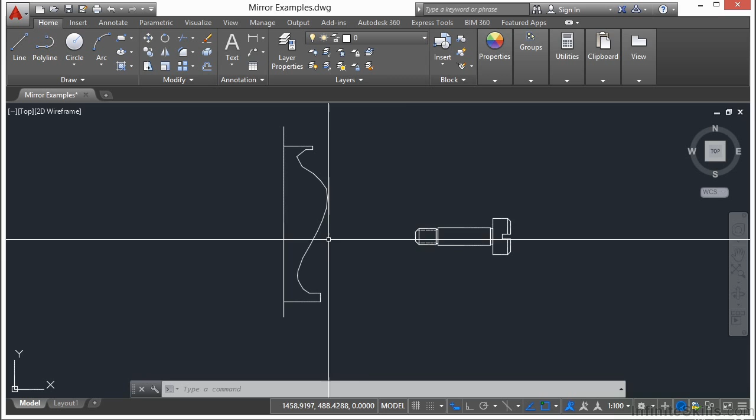Here we have two objects that have already started drawing for us. One is this hex head bolt, it's a shoulder bolt, and the other one that I have here is half of a vase drawn in profile. So we need to start the mirror command before we can get going. Type in the word mirror, or you can type in the letters MI. Not just the letter M, that's the move command. So we want MI for mirror.

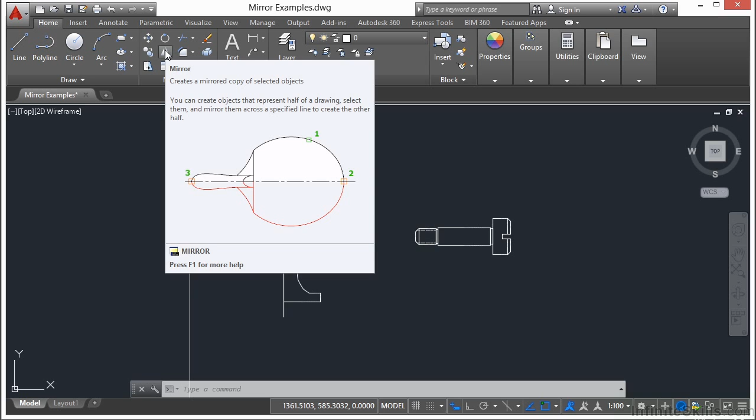Then you can come up to the Home tab on the ribbon, go to the Modify panel, and then go to the mirror command. Start the command. Select your objects. We're going to select this half of the vase. You can pick one object or you can pick multiple objects. Press return. And now you have to create a mirror line. We have to pick 2 points. These points will create this imaginary line that your objects are going to be mirrored on.

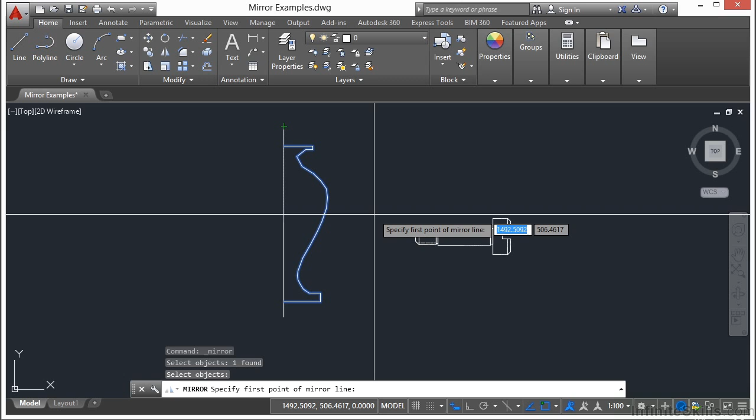In the case of the vase, I've put a construction line drawn in here already to help us out so we can see what we're doing. But you don't have to have a physical line drawn in there. Sometimes, though, it does help you to get a better understanding of the process and to help better define exactly where you need to mirror about. So in this case, I'm going to start off by selecting the top of the line.

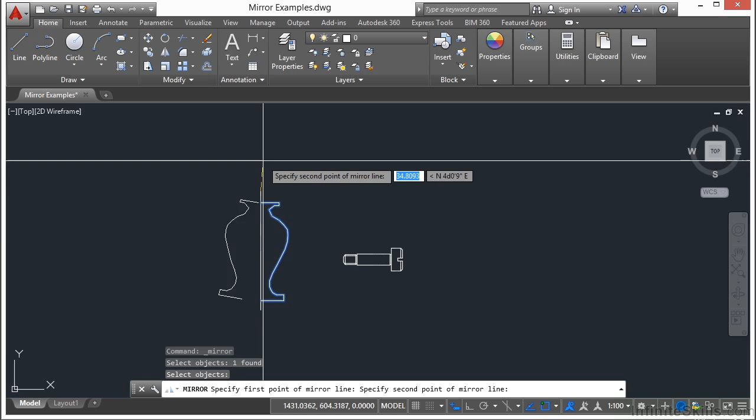And as you can see here, I have a bit of a preview. And you can kind of see how this is all going to come into place. So I have my mirror line, which is that dash line. I just have to pick a second point. So you can use the mirror command actually to be a sort of a rotate command in a way. And I've done that before. With this little preview, I'm going to now pick somewhere else along this line.

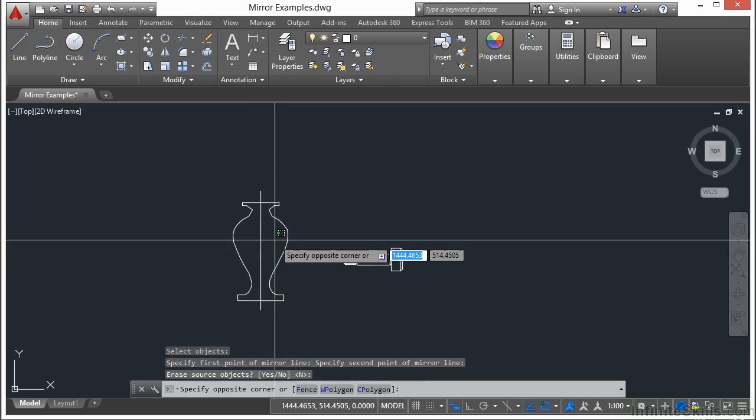And now you're given an option. If I want to erase the source object, that means this right half that I've selected will be gone. It'll delete that. I'm going to say no because I want to create my entire vase and make sure it's symmetrical. Just press enter. And here you go. Now if I select that line and I delete it, you can get a better look. There's a vase and it's completely symmetrical.

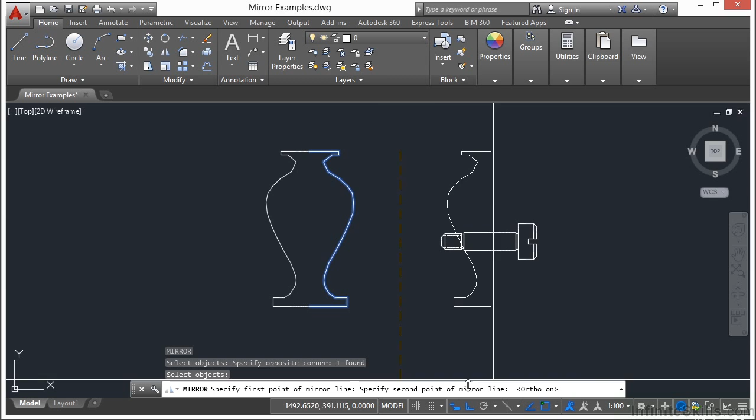Now if I start the mirror command again and I select one of these halves, press enter, I can pick anywhere that I want. And it's going to mirror my object for me. Now remember, I can turn on ortho, and that will help me to lock in my line work to be completely vertical. And this will give you a few different options.

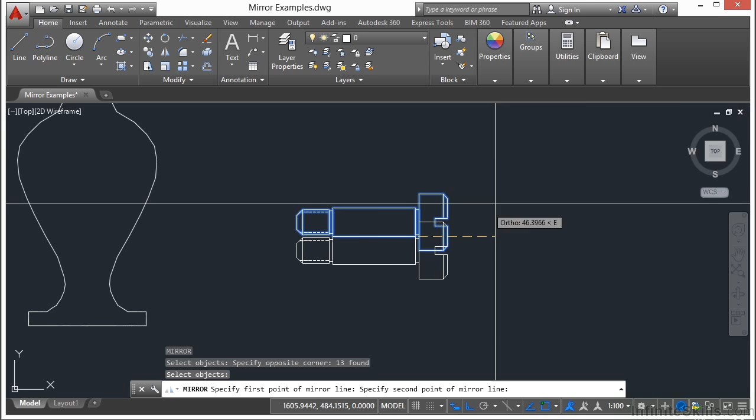So let's take a look here at this shoulder bolt or screw. This time I'm going to use the erase option. So I want the head of the bolt to be over here on the left. So I'm going to start the mirror command. I'm going to select all of these objects, press return, and I'm going to just pick the midpoint of this line, and my ortho is on right now, so I can just come straight up like this, and I'm going to go up to the top.

And now I'm going to tell it yes to erase the source objects. And there you go. So I did a kind of rotation with the mirror command. I just flipped it over. So my old bolt is gone, and now my new one is facing the proper way.